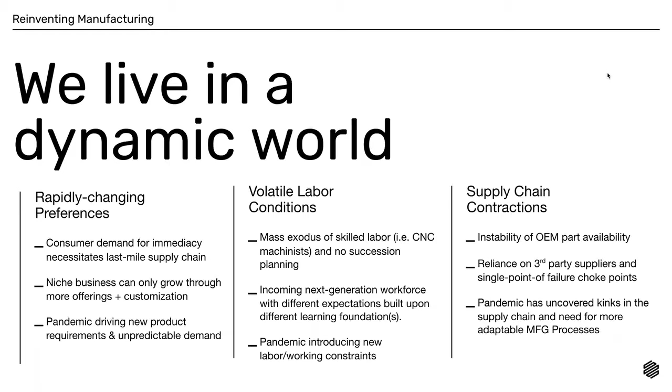The pandemic has uncovered kinks in the supply chain and the need for more adaptable manufacturing processes. The supply chain itself is not as resilient as we once thought.

Especially last year, you saw a lot of factories shut down, and labor couldn't or didn't want to work in manufacturing or factories. Intercontinental logistics break down, and they become a single point of failure for the whole supply chain, inhibiting our ability to get basic items like bleach and toilet paper.

People rushed for those items in supermarkets - there was no redundancy in the supply chain architecture. So once there's one small point of breakdown in the chain, it affects everybody. It's a very difficult time for the traditional supply chain, facing an unsuitable emergency response mechanism.

For example, with shields or face masks, suddenly a lot of people switched to manufacturing those things because there was an extremely huge spike in demand. They had to switch their supply chain because they added this new product, or changed their bread and butter from their original product to face masks.

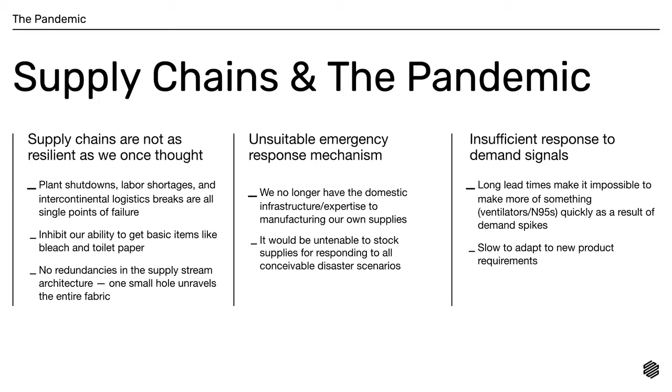It's the same for most other industries like food and beverage - they also have this kind of constraint. If we look at the supply chain, it starts from manufacturing and moves to distribution, then you have a regional hub to distribute locally, and regional shipping by some logistics company, and then point of need - the end customer - will receive that.

In fact, because of COVID and now being in the post-COVID period, the supply chain demand is actually higher, but the supply itself is actually getting more difficult to fulfill.

This can happen for food and beverage manufacturing factories or companies - sometimes you need a prototype or tooling from the supply chain, sometimes you need MRO or spare parts for your manufacturing conveyor, or sometimes you might just want a small volume production, not mass production, for something like packaging.

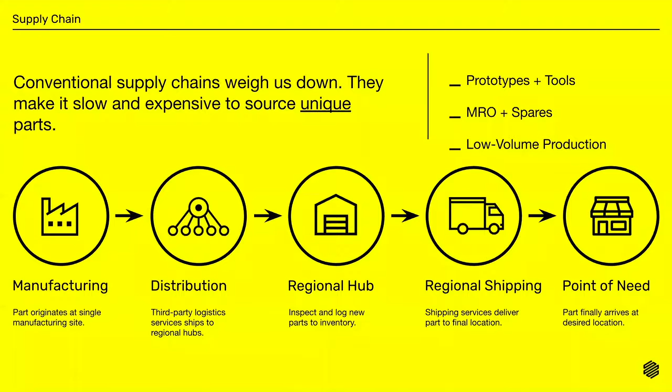They all still have to go through this at least simplified 5-step for the whole supply chain in different manner. But what we see in Markforged is that in the future, either a prototype, tooling, or some spare parts in your manufacturing line, or some end-use part, the small volume production, you can all be thinking about using a cloud-based software and just sending the parts through cloud via internet, so that you can have the actual part, the end-use part or the tooling part, on site by using the printer to print it out.

That gives you a modern manufacturing method, which requires more modern equipment. This method gives you a smarter, more connected way that you can, in a way, indirectly eliminate part of the supply chain, less relying on the part of your current supply chain.

And it's very easy accessing all the parts or components you require just through online in a digital manner, and it can be easily scalable. If you can do that in Australia, you definitely can do that in Singapore, and definitely you can do that in Japan as well.

This is a common picture we see in a mineral water manufacturing plant, part of it is like finishing the bottle manufacturing, the filling and closing the cap, and going to put it into carton boxes. We'll use that picture in the later case study, but just to give you an idea that this is a situation or scenario we see very often, and Markforged technology definitely can help on supporting those kind of customers. So if you have something similar in your factory lines, pay attention for the next few slides.

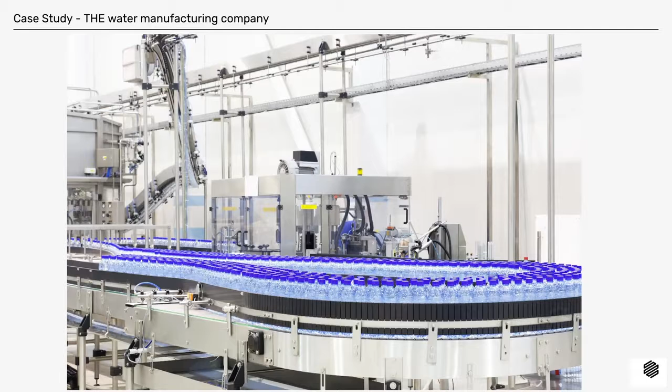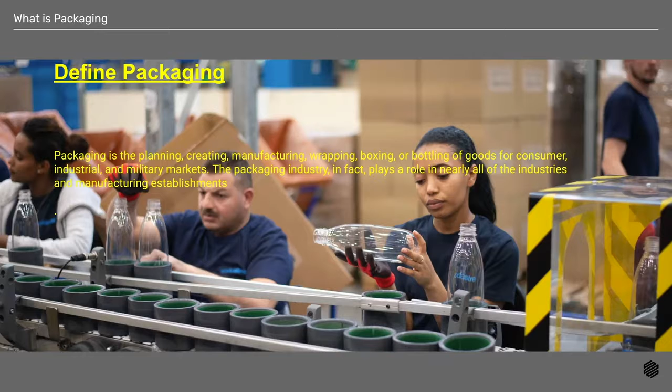Okay, so back to the main topic, we talk about packaging. So first of all, what is packaging? Packaging is the planning, creating, manufacturing, wrapping, boxing, or bottling of goods for consumer, industrial, and military markets. And the packaging industry plays a role in nearly all industry and manufacturing established. So whatever tangible products you have on your hand, they all come together with some packaging method.

To simplify the background about packaging, you can see at the first stage, packaging's major purpose is only used for transportation and storage, to protect the actual products inside the boxes. Then the second stage is people start to see that there's actually some value, or you can bring some marketing awareness by using packaging, so they put their logos or key features on top of the surface of their packaging.

Also, packaging in different industries looks very different. So food and beverage is in this manner, and some consumer goods, I put a toothbrush here. You can see different material or definitely different look of packaging versus food and beverage. And in terms of functionality, like military casing for putting bullets, it's a more niche market. The purpose required for these three industries shows dramatic differences, but they all generally have their own different packaging considerations and features.

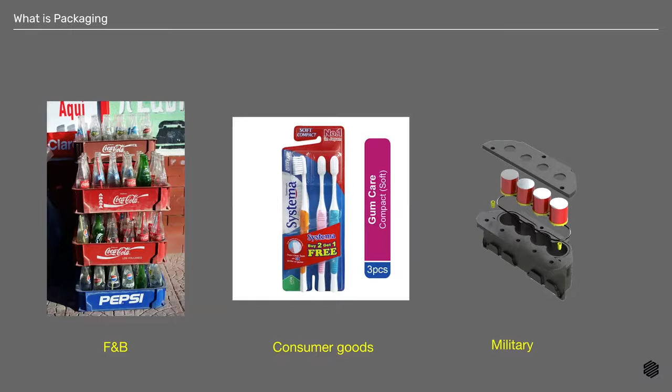For this market, just as an example, for 2020, on a global scale, the packaging industry is an enormous economic generator. Statistics from the well-recognized Smithers Pira organization indicate the demand of the whole world packaging industry will reach over 1 trillion by 2024. Consumer trends and industry trends for packaging drive this gigantic growth rate. There are a lot of different trends, but I just highlighted one that probably matches what we're talking today: personalized packaging. It's one of the biggest trends from 2020 to 2024 in the packaging industry.

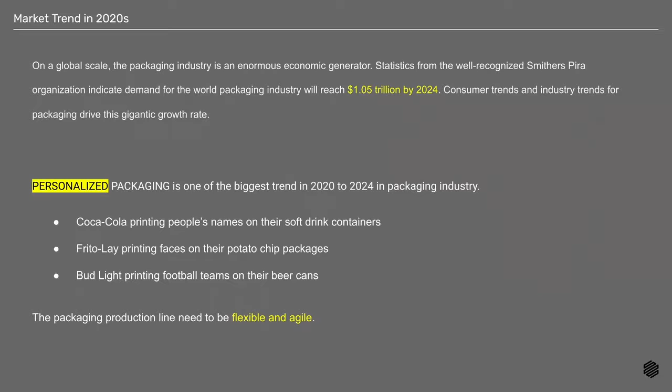Definitely you see a lot of big F&B players keep coming out, the period becomes shorter and shorter, and they keep coming out with new things, new packages or new products, or maybe somehow they just change the package and say this is a new version. Some examples: Coca-Cola prints people's names on their soft drink containers, Frito-Lay prints faces on their potato chips packages, and Bud Light prints football team promotions on their big beer cans. So all this packaging production now in F&B actually requires a more flexible or more agile supply chain to support all those new products or new packaging designs.

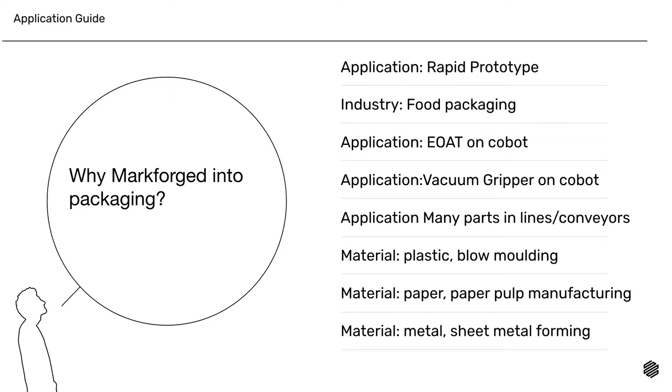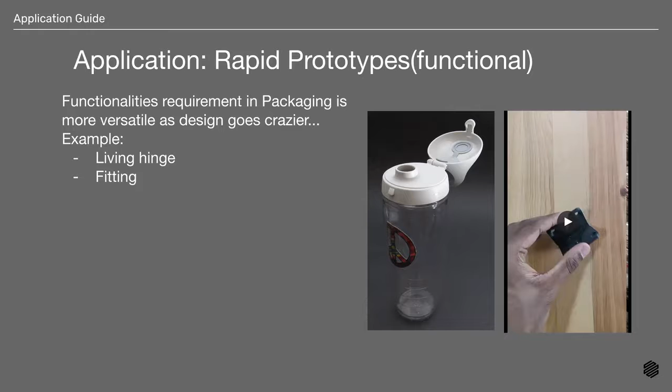I showed this hinge itself - there's no post assembly, during printing it's already like that. You just take it out from your printer, and you can still see the functionality or test your prototype requirements, and it only costs maybe a few hours. In the daytime, morning you print, and afternoon you will have the part.

Another one is in food packaging. The material itself - we have two materials that can actually be used, applied in some food contact or indirect food contact scenarios. One is nylon. Nylon is a very common known material used in different ways in food manufacturing.

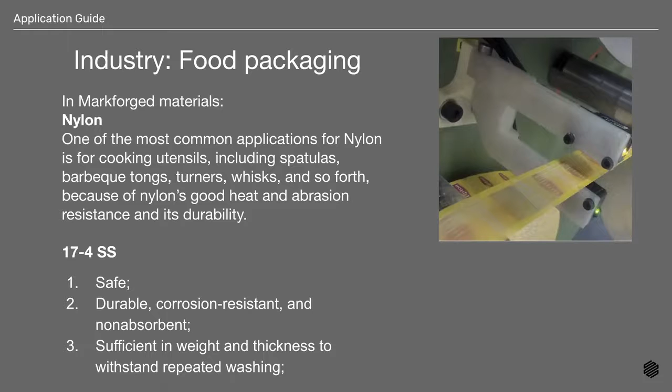Here is actually Lipton - they use our nylon material for the tea bag cutter. So you buy the tea bags in a row, but between different tea bags you have the dash lines, and that is cut by, in this particular production line, our nylon material. Also in our metal system, we have 17-4 stainless steel, and that is also safe and durable to use in the food industry.

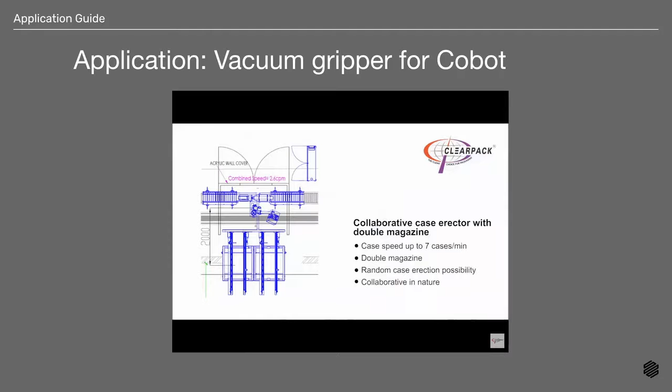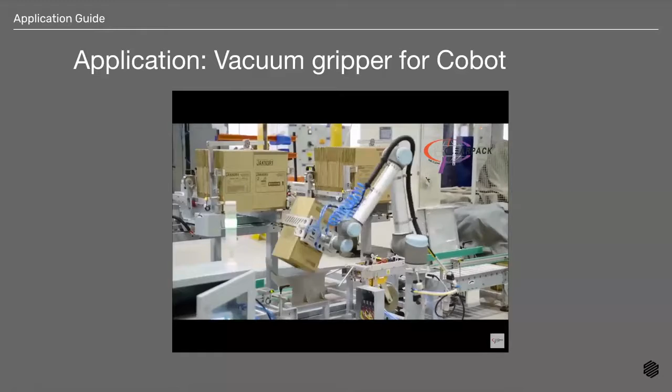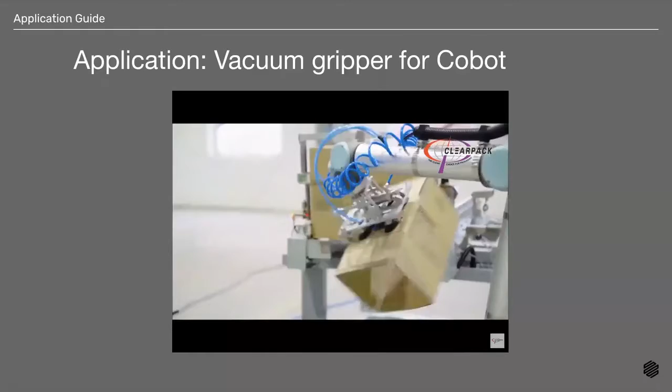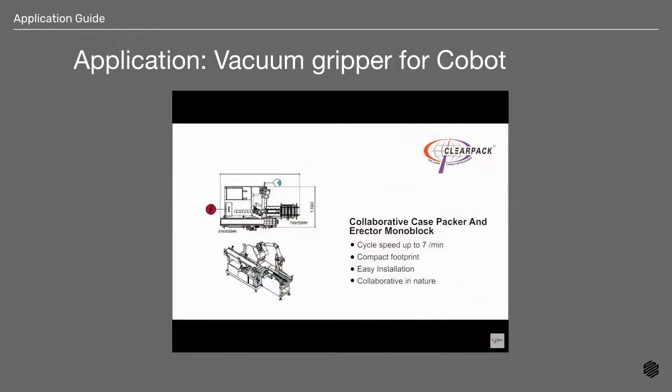Or even more, once you go to more advanced conveyors or lines, you will see a lot of interactive robots, and sometimes those robots can do things by themselves. But different, even the same model of robot, if you ask them to do different tasks, you need different kinds of tooling. For example, here the white color thing is actually a folder for folding the box and also sealing the box. And underneath that, you can see some - I'm not sure if you can see that - some black color vacuum suckers, and those are the things that use a vacuum to hold the carton box in place for doing all those jobs.

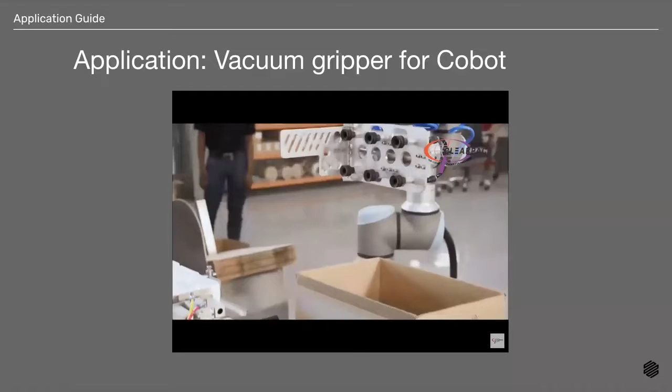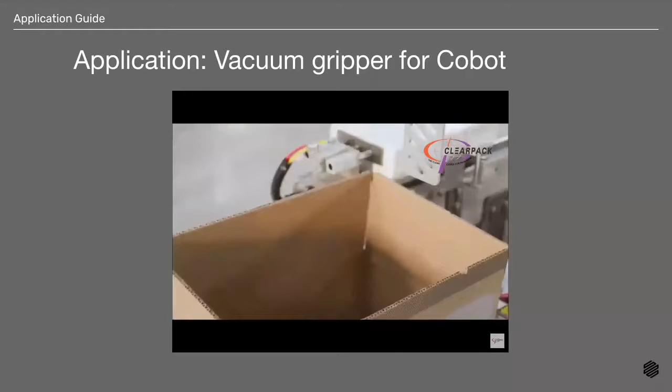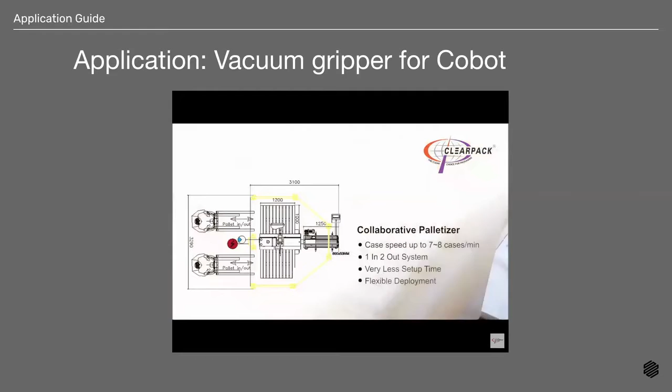So the benefit of using our material is that our printing technology can actually print internal cooling channels, which is different from what you see here, because right now you see the blue color tubes - they are actually the tubes for delivering the vacuum suction. But by using our material, you can put internal channels, or insert those vacuum channels through the parts, the original white parts here, so that you can hide all the tubes and make the whole working environment more tidy, and also the efficiency is better.

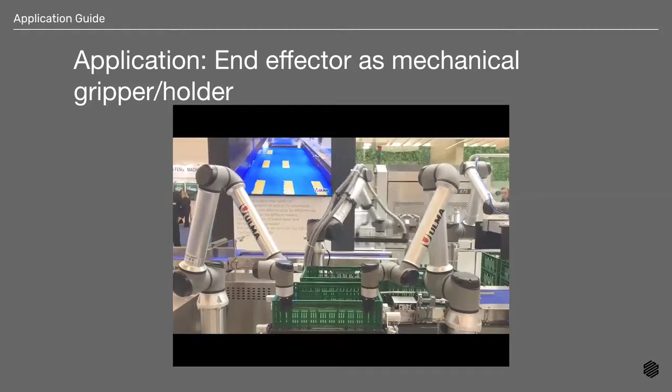So there's a gripper for holding with the vacuum. Also here is another one, just a customized end effector for holding this pallet from one place to another. Different pallets probably need different versions of this black color thing to do the job, and 3D printing can help do that. The reason Markforged is a better option is because our material is way more durable than the normal FDM or FFF material that you see in the market. It can last for a very long time to use.

And next one is the parts in conveyor. Simple parts. Just now we talked about some advanced or highly customized parts for your product or packaging lines, but still in some general parts like a roller, gear, gauge, socket, or O-rings - those are things that probably right now you still have to purchase from your OEM. They have very simple geometry and aren't supposed to be that costly, but because you have this whole production line purchased from an OEM, they say you have to use their own spare parts to ensure performance.

But at this point in time, a lot of people don't want to tie themselves down so much with their own suppliers, but try to think about a more innovative way by doing it themselves - DIY those parts. And it's not just a trend, it's already happening, and people are doing that and getting a lot of benefit from it.

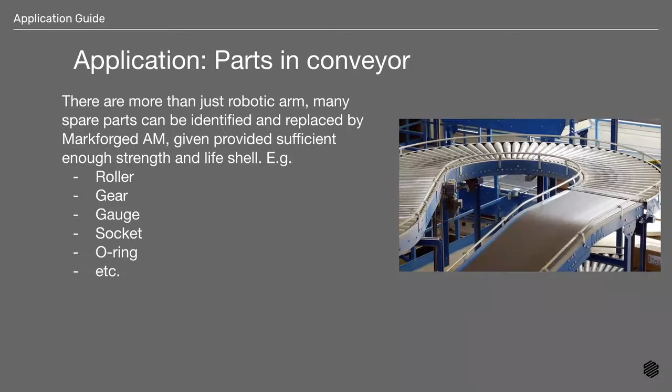Like we have a few customers that have factories in Southeast Asia region, and you're supposed to get the parts from Europe, but right now they can actually try to use 3D printing and do this in-house within a day to replace the part, making sure the conveyor still works smoothly with way less shutdown time just waiting for one part.

Another supply chain application is a little bit more indirect, and here we are talking about plastic blow molding for containers and bottles. This is a great application for our industrial series, because the industrial series printing platform is slightly bigger than the desktop series. So here what I'm talking about is we can print some molds for blow molding.

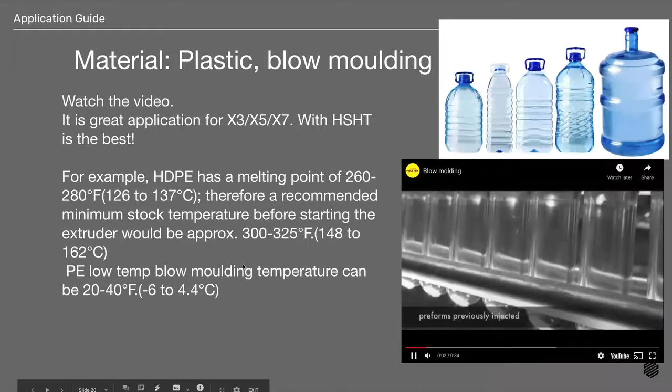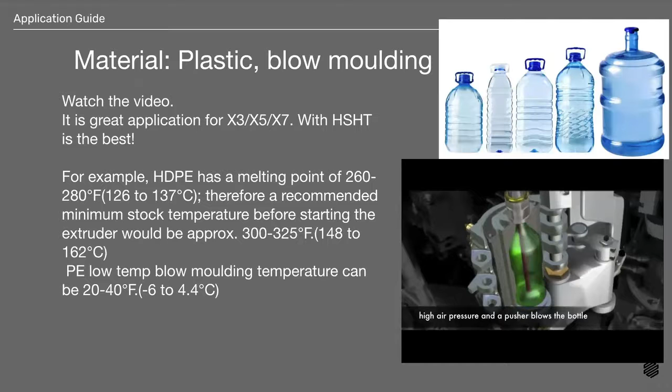If you're not very familiar with blow molding, here is the principle of this manufacturing process: you create the mold, and the original bottle part looks like a tube. Then you use high pressure air to blow it, and then you will have the shape. In order to form the shape, the outside pattern is required. What I'm saying is we can print those patterns as a pair and use them in this blow molding part.

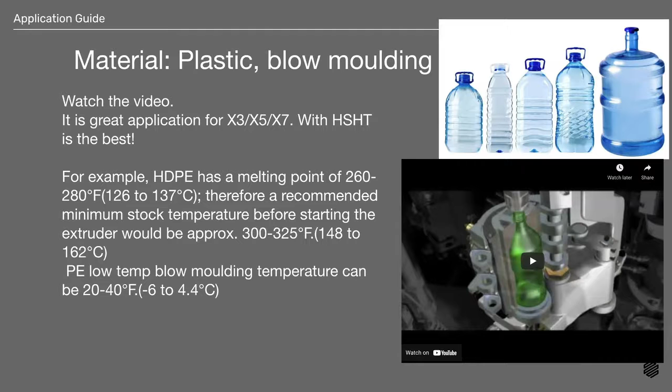From what I understand, usually F&B factories do not manufacture molds, but need to purchase them from their vendor. If their vendor can't deliver on time, then the whole manufacturing process needs to wait just for a pair of molds. And sometimes the mold may also have some error or failure, then you need to request another one. So for a quick turnover mold, you can think about using 3D printing to fabricate the pair of molds in a faster manner.

Okay, another type of packaging is paper pulp, and the paper pulp also needs to form the shape. You can see here the final paper pulp package, and here is the mold that you can use 3D printing to print out.

So the purpose of using that has four different benefits. The first benefit is for designing holes and porosities, because paper pulp is slightly different from other molding - you still need to have some tiny holes or patterns for them to better adhere together, so it requires holes and a certain porosity.

And the porosity is actually our strength. We can print parts with porosity inside the part itself, so that it can run like, as I mentioned, a vacuum, or certain suctions, so that it can help the adhesion and bonding of this paper pulp.

The second thing is it can be a very good tool for design validation, because first, it's faster, and second, sometimes even comparing with developing countries, I would say, depending on design, we would still have a benefit on cost. We can use a cheaper manner, just on the material cost, to print out this thing and do the design validation. And it's a very good bridging tool from design to mass production.

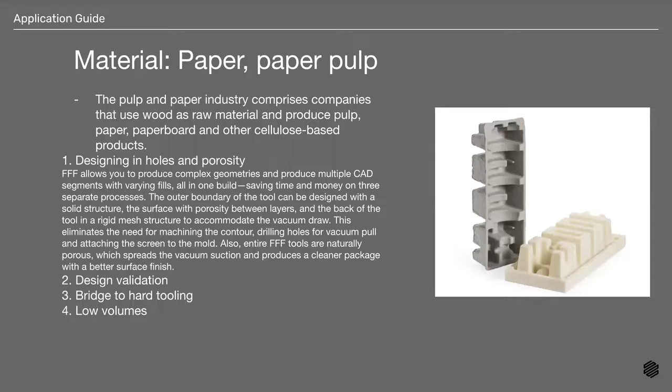And lastly, if you just require maybe dozens or let's say a few hundred parts, one tool is good enough - one 3D printed tool is probably good enough for you.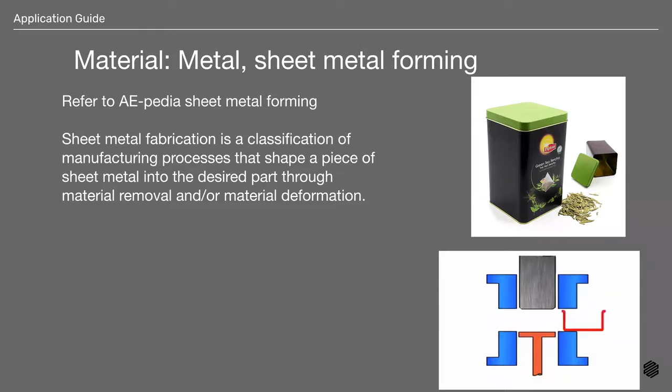And our material is also able to help make the pattern, and is strong enough to press on and leave some patterns on those sheet metal forming applications.

Then we go to case study. So the first one is Lipton, which I showed in the first few slides.

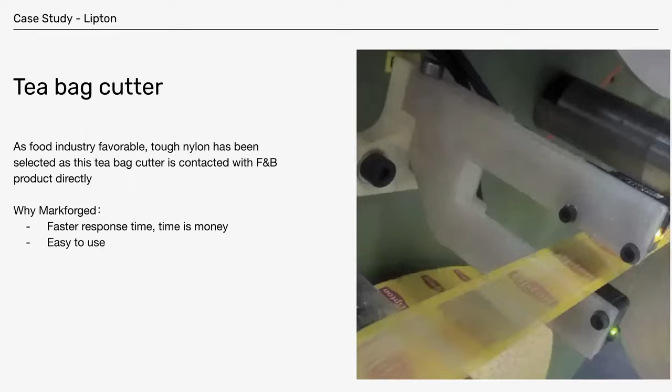The reason they chose Markforged as their application supplier is because Markforged can give a faster response time. When they have a part broken, they can just print it out, and it doesn't require an MOQ on this particular part. When it breaks, you can print on spot, then place it, eliminating some storage costs. Also, the machine itself is very easy to use—just one technician with a few hours of training is able to do that.

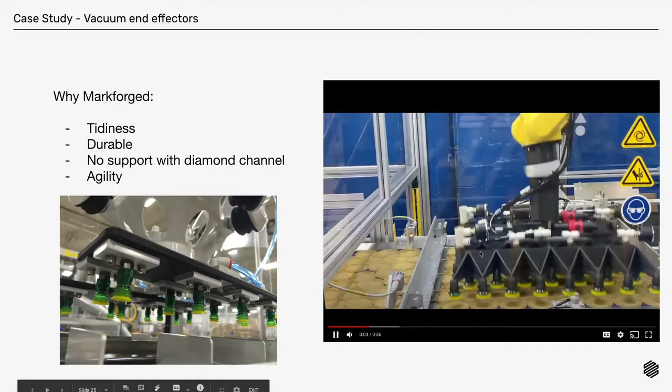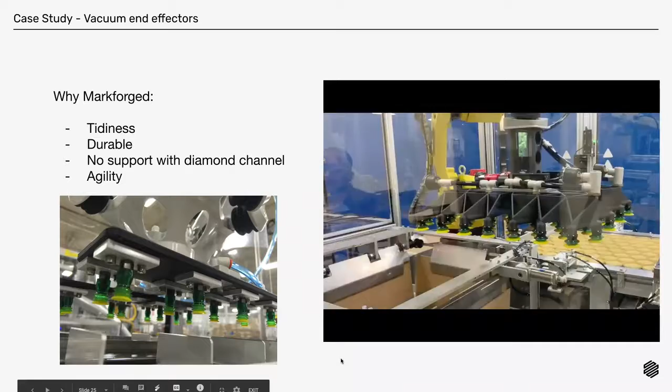Another case study is the vacuum gripper. This whole part you see here is made by Markforged. Like I mentioned, you can embed an internal channel into our parts and apply it here. It's definitely very durable for holding multiple covers or caps at one time.

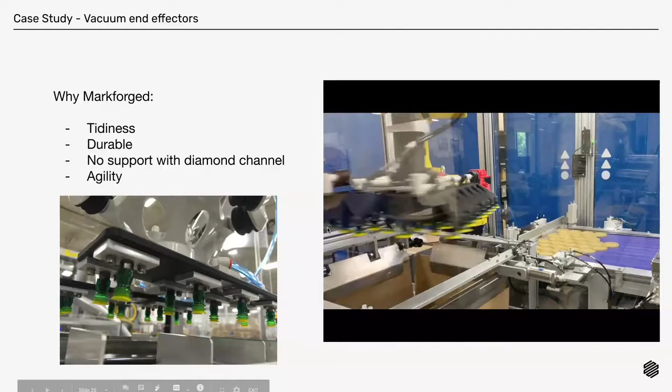Back to this picture I showed in the first few slides—it's actually one of our strategic accounts that we still try to develop more opportunities with in both Europe and APAC. So the story starts with one X7 in Europe, and Markforged helps them develop an e-cataloging system, and also helps them adopt our cloud software called Eiger.

For the same case, it's actually a worldwide water manufacturing brand, quite famous. The reason they are worldwide is partially because the whole production line uses the same things in Europe and in Asia, like Japan or China. All the suppliers for the conveyor, to support it running smoothly, come from the same suppliers, and those suppliers earn a lot of money based on this company's operations.

So in 2020, once they became aware that an X7 Markforged printer was already purchased in Europe, they developed a lot of parts that could be used on their conveyor lines. So we just tried to copy and paste that in APAC last year.

Due to COVID and import restrictions, it really accelerated the adoption of additive manufacturing. They have one plant in Indonesia, and for those who may know, for an Indonesian company, importing parts is not as efficient as in Singapore, maybe your country, or Australia. So it really hindered the whole supply chain for Indonesia to get parts on time from Europe.

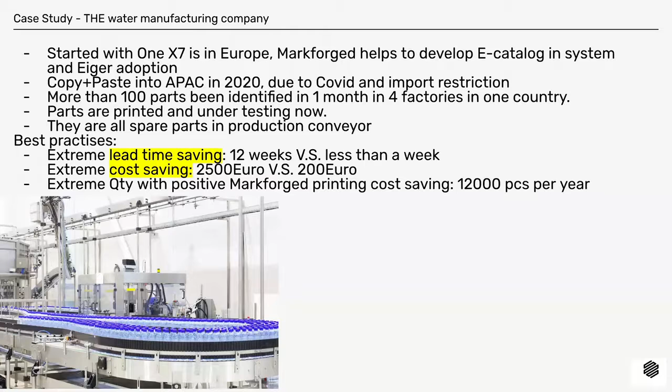If you talk to Markforged or a Markforged reseller in your region, you may have seen these lines. This line is actually talking about how the value shifts from the very beginning of adopting 3D printing until, at the end, how this 3D printing business is going to impact the customer's business.

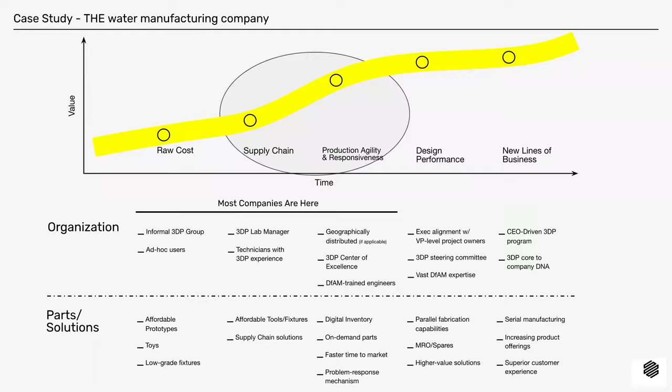I would say for this company, they are right now at stage 2 and 3. They start to see the value of supply chain, and now they are seeing different ways or identifying different parts in their factories to get production more agile and a faster, responsive supply chain compared with their competitors.

In the meantime, you can see inside their organization they already have a 3D printing leads team, distributed to multiple regions, not just Europe or APAC, but I think North America also. It's a global initiative already, but it still hasn't reached a centralized resource.

They start to have some 3D printing centers of excellence, with different printers in-house to try printing things, and also see the possibility for one part instead of just using exactly the same design from OEM - they try to optimize the design to follow the Markforged design guide. So that's all happening right now for this company, and they really receive the benefit from that.

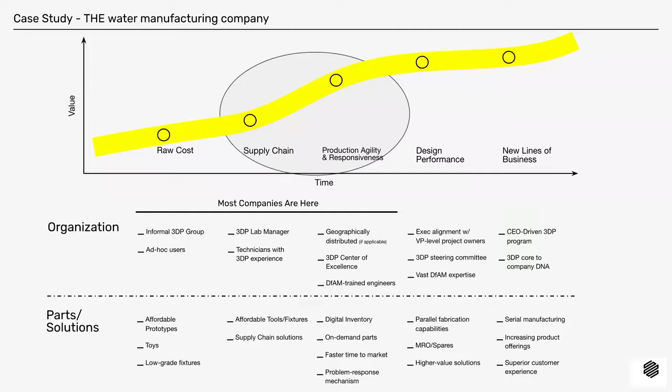Lastly, this final example is a lean machine and process improvements drive profits. The company is called Lean Machine, a contract manufacturer, and 3D printing helped them create a higher yield manufacturing cell in days instead of weeks.

What you see here is, for example, sheet metal forming or a bending machine, and parts of this can be 3D printed. Also here, the end of arm tooling uses robotics to do this operation, and after that they do the QC check. Both use this robot arm, and here these scissors-like parts and end effectors are made by our stainless steel, and they can be used for a long time.

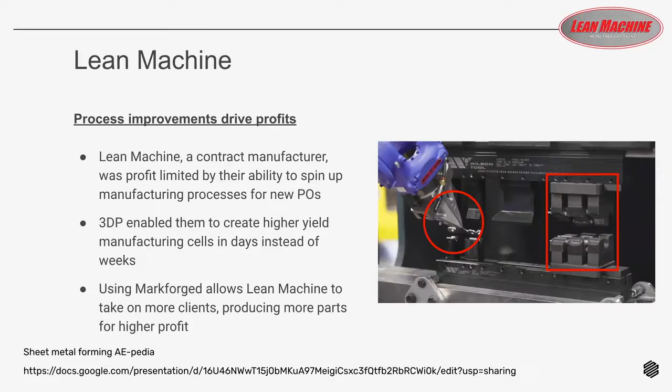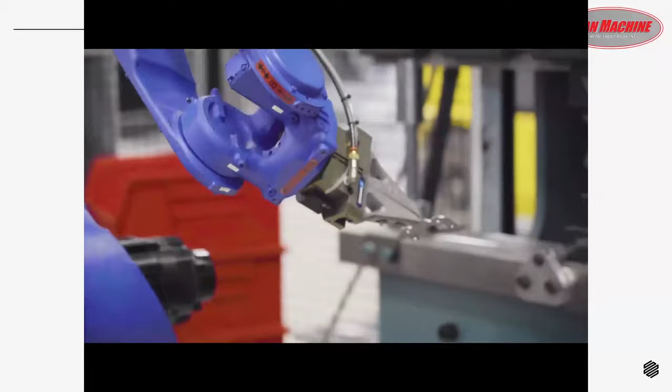That's pretty much all there is in this video about that - take a look. This scissors-like metal effector is made by Markforged Metal Print. They finish the bending, the second bending.

It also represents the precision or the quality of our print. Like, one pair and you print another pair and use it on the same operation - it shouldn't have much deviation.

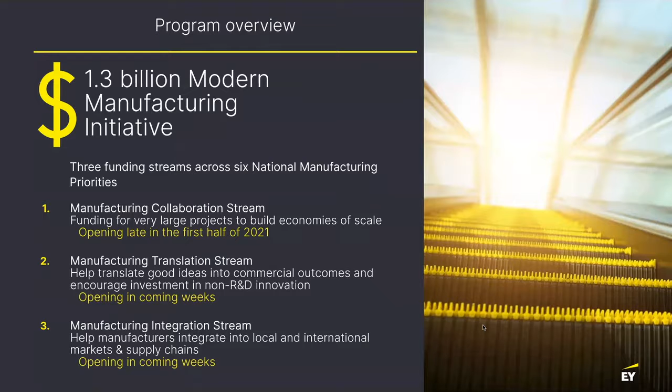Just go to the next slide, please. Thank you. So as I was saying, two of the streams will likely be open in the next week or so and are worth flagging for your attention. So the first is the translation stream.

This is where government is looking to back manufacturing businesses in strategic projects that will increase commercialization, embrace technology, innovation, and automation. They're looking to fund areas trying to grow production and bring commercial outcomes to new or existing markets. The integration stream is looking to achieve similar targets, but they're looking to invest in projects that will increase a manufacturing business's participation in new local or global value chains, again embracing technology, innovation, and automation.

Applications for these grants will be competitive, and your assessments will be determined based off key merit criteria. So there are three of these. The first is the alignment of your project to the program and the objectives therein, a sample of which is already shown on the screen.

Once the priority roadmaps are released, we'll have a better indication as to how your project might fit each of the different streams. The second area of merit criteria is the capacity, capability, and resources for you to deliver the project. And the third is the impact of the grant funding on your project.

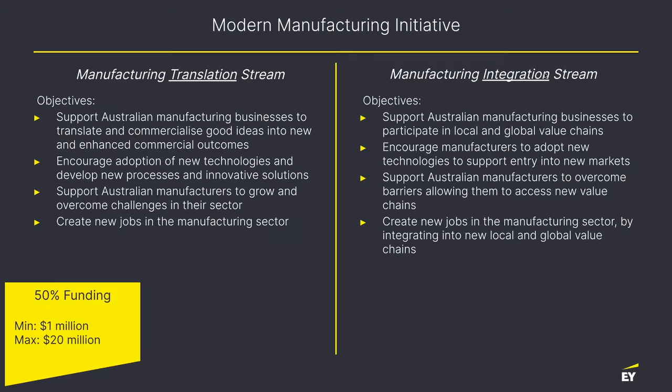Next slide, please. I think you may have skipped a slide. Yes, okay, great. So this is about eligible expenditure. So in your $20 million, what is exactly covered? The first is plant and equipment.

This can cover things like designing, acquiring, installing, or constructing new plant and equipment. It can also include software, but only where the software is required to facilitate the implementation of the project. You can include your labor costs, direct labor costs, as well as technical project management, and where you get third parties involved as contractors.

You can cover your prototype costs, where you're looking to prove that you have a commercially viable and unique product, or in the IP patenting process therein. And finally, you have travel and a smattering of other costs. This could be domestic or overseas travel, building modifications, staff and training, similar sorts of categories to that.

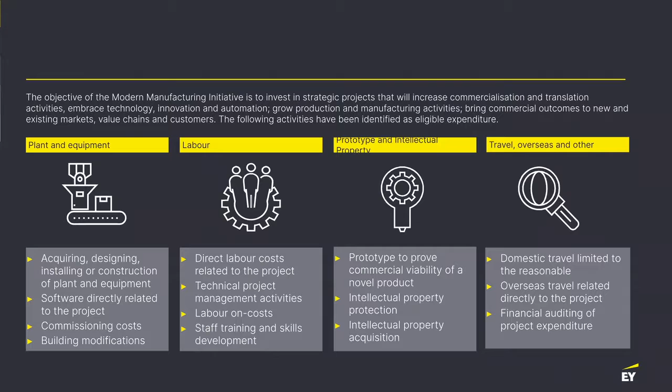And on the last slide. Okay, so if the streams of the MMI do not specifically align with your projects, there are other funding opportunities available. You may wish to explore more of a research focus, along the lines of the CRC-P, or you might be focusing more on increasing job creation.

If you don't want to go towards more of a grant source of funding, you can look towards the R&D tax incentive, which is a bit more of a retrospective perspective, rather than looking at forward planning for your pipeline.

Please be aware, though, that these are just a snapshot of current funding opportunities, and they are Australian specific. The funding landscape changes frequently, so it's good to keep in mind the projects you have in your pipeline and how they might align, and to constantly compare to funding that's coming out.

If you have a project that you think might align to any of the funding opportunities I've discussed and you want assistance in scoping or preparation of an application, please reach out to me on the contact details there. Alternatively, if you are not from Australia and you have a project you think may be eligible, please reach out and we can access our broader EY network and see how we might be able to help you out. Thank you very much for your time.

Thank you, Adam. I think the reason we have Adam here is to let you know the options for you to more easily adopt this, since local government, for example in Australia, has such funding to support all the initiatives, and we see the similarity that our company's mission is to really empower manufacturers in different industries to adopt more advanced technology to help them have a more agile supply chain.

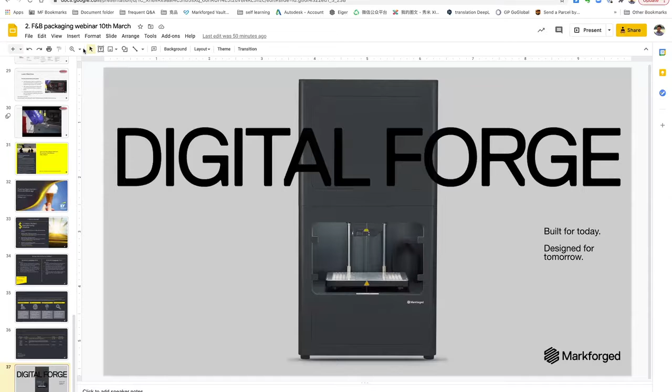Can you please write your email here? Yes, for sure. Sorry, let me write my email here. This is my email, so if you want to discuss applications, feel free to reach out. Sorry, short of a D. Okay, there you go.

How will 3D printing be cost and time effective compared with the current method? Two things - sometimes we can match both cost and time savings, but sometimes we can only achieve one at a time, so it depends on the parts. There are multiple different parts, and you'll be surprised that some parts are actually very costly from the OEM. For example, there's one part we print within a day - a pair of grippers for holding the bottle - and that can easily cost 2-digit, 3-digit, or 4-digit amounts from a European OEM for the original part. That's where we save cost and money, because we eliminate the whole supply chain. When we talk about cost, we're comparing the material cost from 3D printing versus the cost of logistics, raw material, the OEM cost, paperwork, labor cost, and storage cost - that's the benefit of using additive manufacturing in-house. For time effectiveness, it's the same - using a printer in-house versus the whole supply chain lead time. That's how we compare cost and time savings.